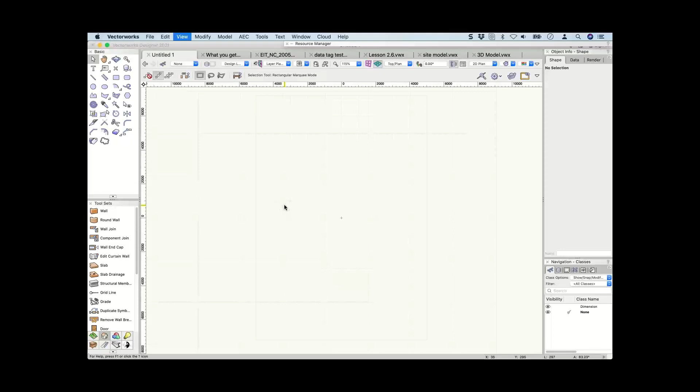It's interesting when I hear your introduction, Barbara. Someone asked me the other day when I started using Vectorworks. It was 1992. Just yesterday. Next year we should have a celebration.

Yeah, we should. Okay, so this is Vectorworks 2021. I've got several files open that should help us understand the things I think are important in Vectorworks 2021. Some things haven't changed a lot. I know they've made some changes to the door objects, but not massive changes like to the window tool, which a lot of people like but you can't get that this time.

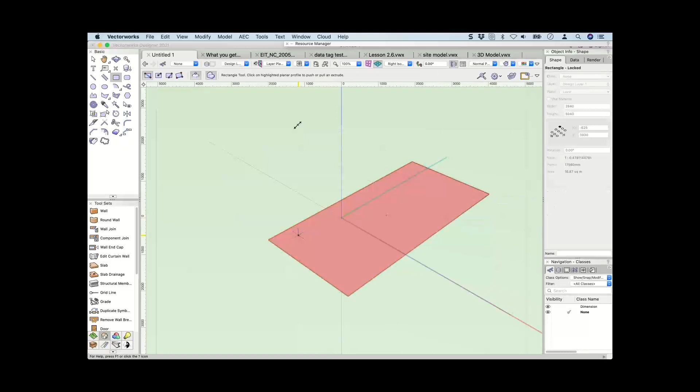No, but let's start with some of the simple things. So this is the rectangle tool. Let's have a look at the rectangle tool in 3D. There's a new mode on the rectangle tool, this push-pull combine tool. The way this works, and it's not just this tool that has it, is when I extrude an object like this, which we've been able to do in the past, this new mode, when used, lets you draw on the face of the object - I better make sure I'm in automatic working plane.

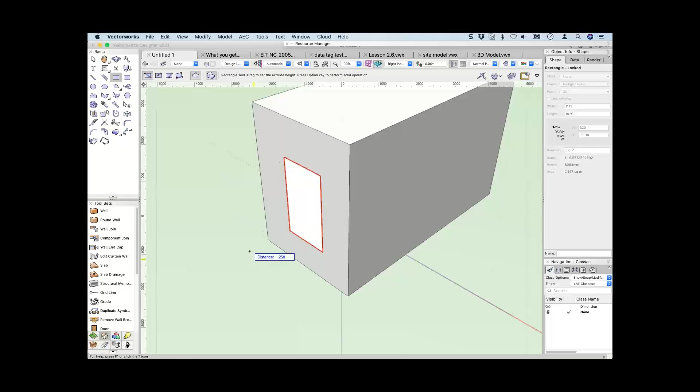So when I draw on the face of my object, if I come away from the object, let's make that about 8 inches, 10 inches, 250 millimeters. When I come away from the object, Vectorworks will now automatically, instantly add those together. You'll notice up here this has now become a solid addition - it's no longer necessary to hold down the Option or Alt key to do it. Now if I'm just going to shell the inside...

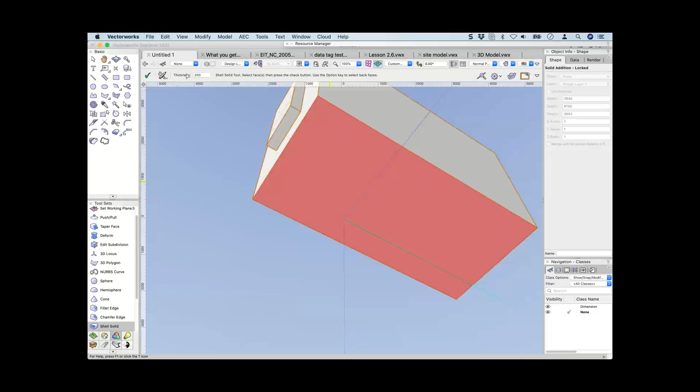This isn't new, but I want to shell the inside anyway. Shell the inside, let's make it 8 inches. This is my inside. Now I go back to my rectangle tool and create a rectangle across here. This time I'm going to go into my object, and it's straight away instantly push-pull. It's made a hole in it, which you can now see because I can see through it. These are the new ways Vectorworks handles 3D modeling.

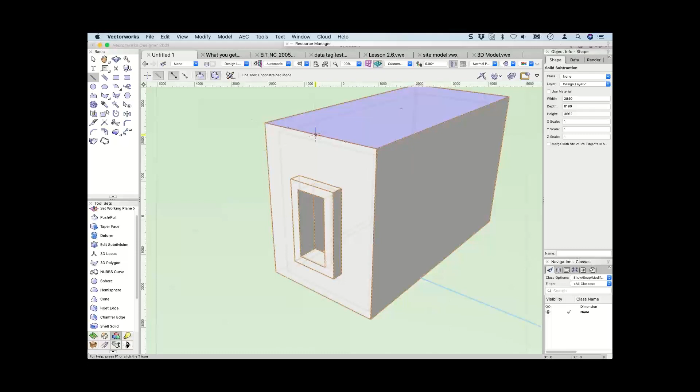If I go to this object here - now I should have done this before I did my shell solid, because it's going to cut through it - but you can now instantly draw on the face of an object, instantly grab hold of it, and pull that away. This is quite a cool way of working now. It's a very quick, very fast way of doing it.

That's new, but if you want to add something to the front of an object - I've just finished my movies for my foundation course, and one thing I learned was when doing the bracket example. I made a little bracket like this, put a circle on top and extruded it. But if I put a circle here and extrude it, and come down here, instead of adding those two together, it actually takes them away. Let me do that again.

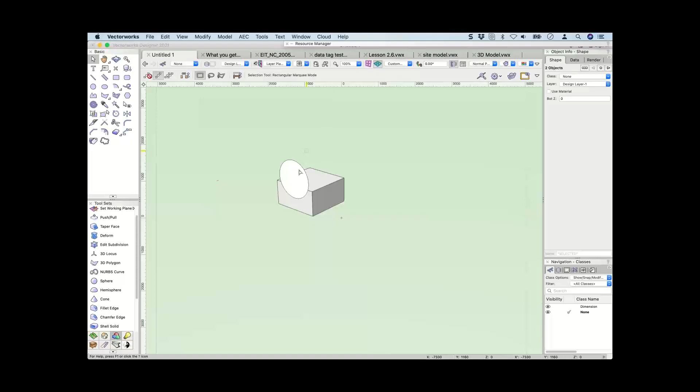I hadn't tried holding down the Alt key to see if I could get around it, so I tried that. Pull that down to there, hold down the Option or Alt key - it still subtracts, doesn't stop it happening. The only way to really stop it is to turn off, when you're in circle mode, turn off that mode. When you turn that off, you can drag it along and it won't add together, but later you can add solid to that.

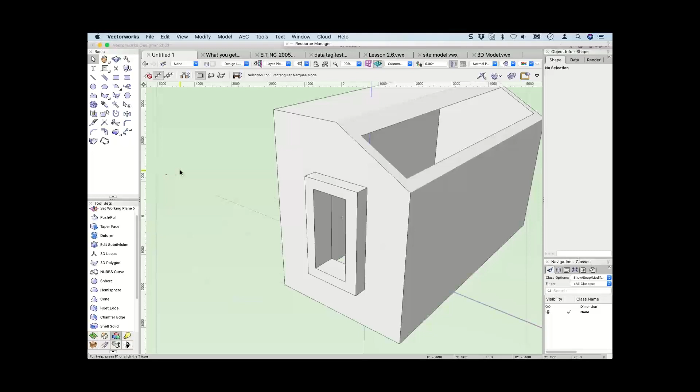So that's just one thing to look out for, I think. It's going to speed up 3D modeling enormously, this ability to instantly add, instantly subtract. When you know it's there, it works really well. There's just the one time you've got to be careful where it doesn't work quite as well - or it's not that it doesn't work as well, but it can catch you out, and that's what it did to me.

Now, one of the main features I found with Vectorworks is this smart options - to me this is a real productivity gain. I don't know if anyone can see it, but there are 4 little things that have just turned up, one there, one there, one there, and one there. These turn up when I put my space bar down.

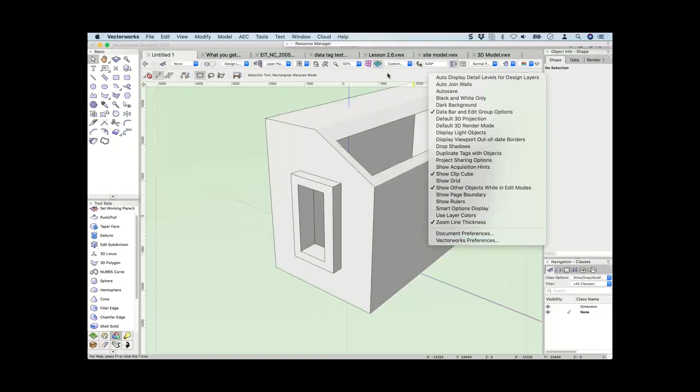Right-click on the toolbar - I don't remember this working before, but right-click on the toolbar and you can go to your Vectorworks preferences. We've got Edit, Display, we've got Smart Options, and here you can choose what tools you want to appear. So for example, if you've got a standard keyboard, you may want to change this to the snapping palette so you can quickly check your snaps when you want to, and leave the snapping palette closed when you don't want to see it.

Previous tools is really handy. I've actually created my own little palette that I like to use, with tools that I want, and it's just a standard palette. I've created a little standard palette and added it to that top left corner. So when I go to it, you'll see it's a lot smaller than the previous one. It's got a couple of my customized tools, but it's got the things that I don't remember the keyboard shortcuts to.

Now, I remember the keyboard shortcuts to lots of things like move tool, or move object - move by points, sorry, it's called. I remember the keyboard shortcut for that. I've customized it to make it really quick to use because I use it a lot. That means I don't have to think about it. The principle behind this is that by putting the tools close to your cursor, your eye doesn't have to leave where you are, your mind doesn't have to change to go look for something.

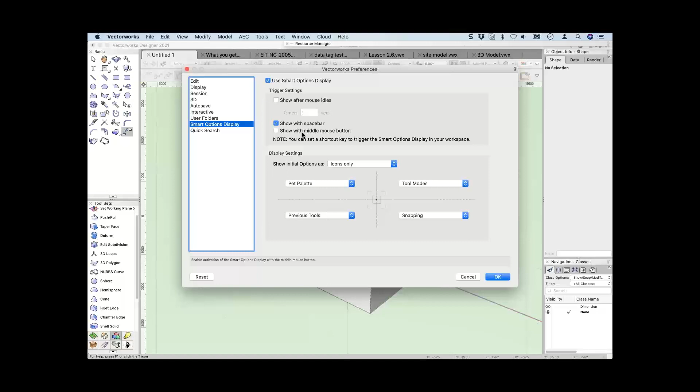And so it can keep you focused on your work, making you more productive. As I said, I've just got a very small number - a couple of 3D tools I use quite a lot and some 2D tools I use a lot. But it's very, very fast, very customizable. You can choose your options, how to trigger it - some people have it after the mouse idles for 2 seconds or 1 second. I just use it with the space bar. You can use it with the middle mouse wheel button, but don't forget that's also the pan tool, so you might want to be careful about using that particular way.

There's a quick search function in Vectorworks now - I think it's under Tools, Quick Search. We want to look for walls, and it brings up all the things that relate to walls, wall schedule, so there's a whole lot of things. This is quite a handy little utility, this quick search. I'd wonder whether we need a key to activate it - it'll be quite handy.

I've got an Excel file on my other computer screen, so I'm just going to go through it. Yeah, the detachable tool palette. So I didn't realize I needed detachable tool palettes until it occurred to me that we normally have to look at classes and layers separately.

Now, it's not so bad in this particular file, but let's go to a file where there's a lot more layers and classes. And this is quite nice because it allows you to see all of your classes and all of your layers together. You can also drag some of these out. If I don't want to see that anymore, I don't use reference files very often, I can remove it. This is my viewport, so I hardly ever use this one. I'm going to remove that as well.

Oh, sorry, that was saved views. I do use saved views, so I better bring that back. Window, palettes, saved views. So there's my saved views, and I can put that back where I wanted it there. But usually I use saved views from this pull-down menu anyway, so I could easily get rid of it. Viewports, I don't use these very often. You can drag them out and then close them if you don't want them.

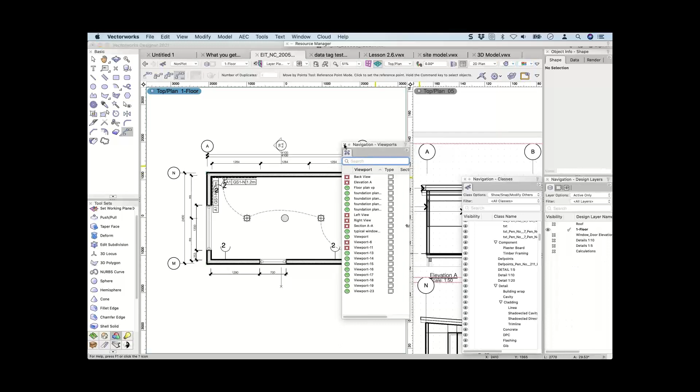And shape and data would be really handy to see both at the same time. So I can see the data attached to an object and I can see my shape at the same time. So if I select an object like this, I can see the shape of it. I can see the data. Of course, I've got more palettes open. Maybe I need a bigger screen, but if I do have another screen, I could just drag all of these onto the other screen. I could have all the palettes open, so it could be quite handy.

But for today's presentation, I'm going to put them back. And you'll notice that when you put them back, you can choose where they go. So you can now reorder these palettes and put them back in the order that you want. We're so used to having the classes first. I just grab it by the tab, and then I can locate it in there. I can move its position along if I want.

And so those are really handy. As I said, I didn't think I needed them until I could have them. And now I'm really quite happy with those. The ability to do those things together is quite nice.

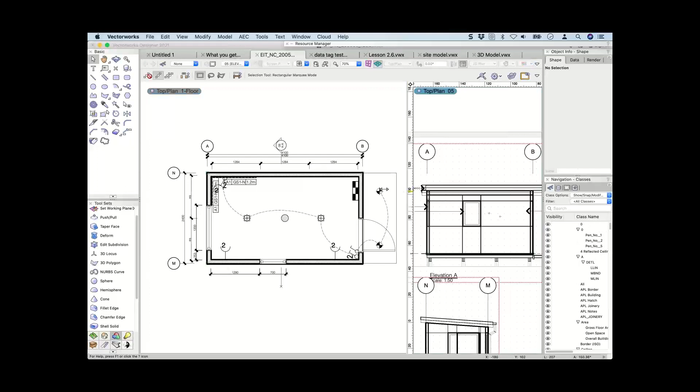We need to look at our smart markers. I've got here a drawing and a design layer all at the same time. So I'm looking at a sheet layer and a design layer together. And I wanted to look at the floor plan of this one. So click there. You can see it's my active one, it's gone blue. And let's look at my foundation plan. There it is there, and there's my smart marker.

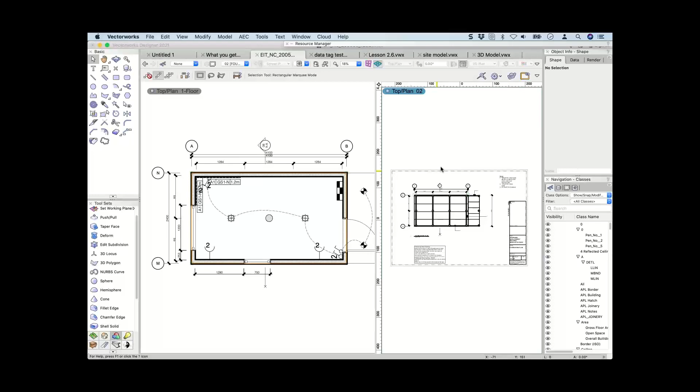So I'll just bring that and make that the front view. So there we are, there's my foundation plan. If I double click on this, I'm going to delete that particular label. No, just the label, thank you. There we are. And I'm going to look at my markers. So annotation. Now there's several smart markers now.

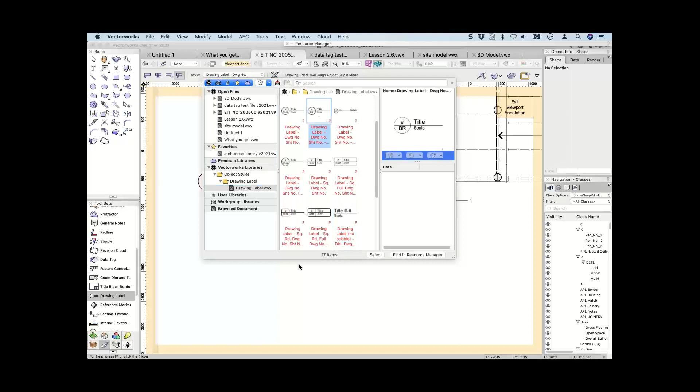They've changed things like the drawing label. I'm going to change this to another drawing label type. I'll use that one. So this is a pretty standard drawing label.

I see there's some questions coming through. I'm wondering if it's possible to create parametric objects. Absolutely, you can do that. Not for today, we're not going to cover that. If you don't see the push-pull mode for the rectangle tool, change to a 3D view. You don't see it when you're in a top plan view. Do I use a customized workspace all the time?

Let's just go back to this tool here. So this is the standard drawing label, and we used to be able to choose whether we had the scale, whether we had the note, whether this line was fixed automatically to be the one length. But we were limited to what we could actually do with these things.

So in Vectorworks 2021, one of the things they have changed is they've changed nearly all of the markers to what they're calling smart markers. So this is a drawing label style. So that's my own one. I've already customized that one.

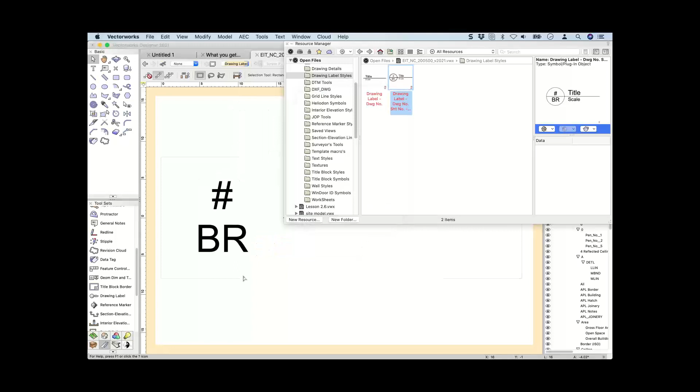This is the one I've just used. Right click, let's edit this, and we will edit the drawing label layout. So this is the layout for my drawing label, which means that I can move this to a different place if I want. I can move the title somewhere else if I want. And when I do that, it affects what we see on my screen. So let's exit that, and you can see it's changed those parts.

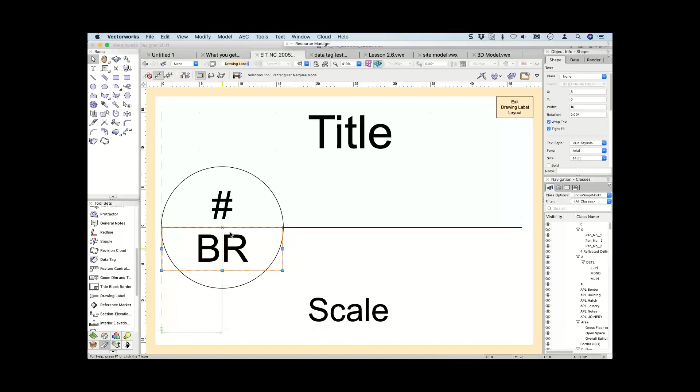Let's edit this again. Let's say I don't want that, and I want that to be something else, or I don't want it. I want to get rid of that circle. I want that to go here, and I want this to go there. And I might want some other piece of text on there as well. So I'm just going to make a copy of that. And now we have the ability to say, let's get automatic text. Let's define the text label.

So this is very similar to the way we create title blocks. We also had the data tag. This is very similar to the data tag. I don't want it to be the scale. I want it to be something else. Maybe we want that to be the drawing. We've done drawing number, custom scale note, label length, printed length, sheet number, scale factor.

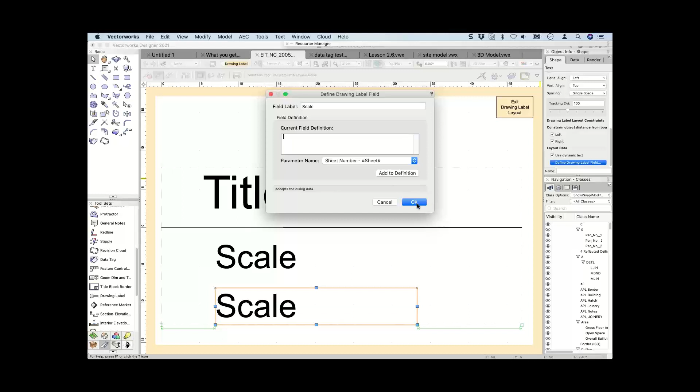It would be nice to have something else like the design layer or the sheet layer. I'll just put sheet number on there. And then hopefully that'll bring all the information up. When we exit the viewport, that might give me what I want.

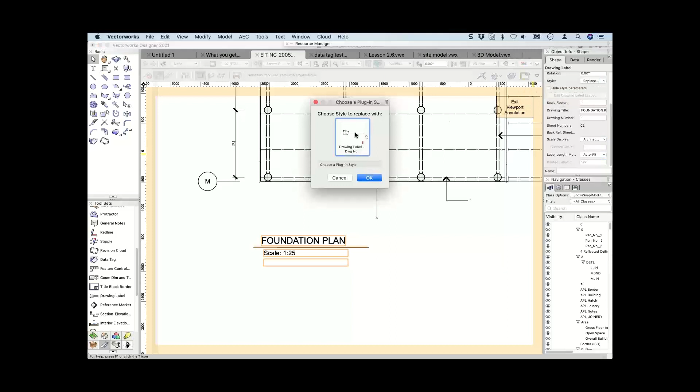Also, if we don't like that label, I can swap that label with another one. Sorry, here's my style just here. I'm going to replace that style. Where's the one I do like? I've gone to some trouble setting this up. And I'm going to go, okay, that's my foundation plan. You notice it's quite small. It's just the size that I want. It's got the graphic style I want. It's got the fonts that I want. So I've had quite a lot of control over which parts of that label have got which fonts, how long the lines are.

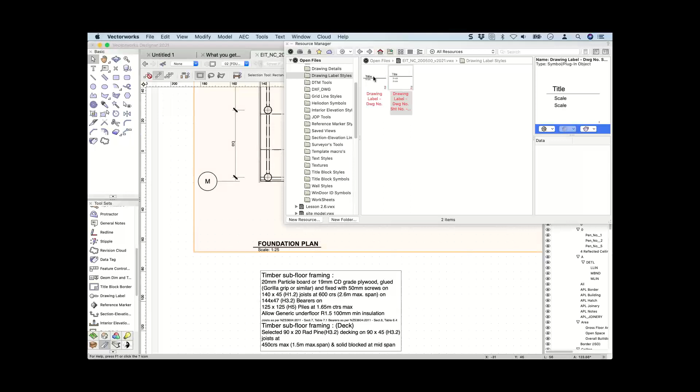When we edit those lines, we've now got the ability, let's edit this one. Oh, that one. So one of the other things that I've changed with these smart markers is that this piece of text here, this title, it's got one of these little green constraints. This is from, where do they hide?

Constrain, coincident. In Vectorworks, we've always, well, for a long time, we've had these constrained objects, constraining things to other locations, constraining things by length, constraining things by vertical distance. And so we've got something similar to that here, where the start of this text is constrained to the start of this line. So wherever I click that line, that'll start that.

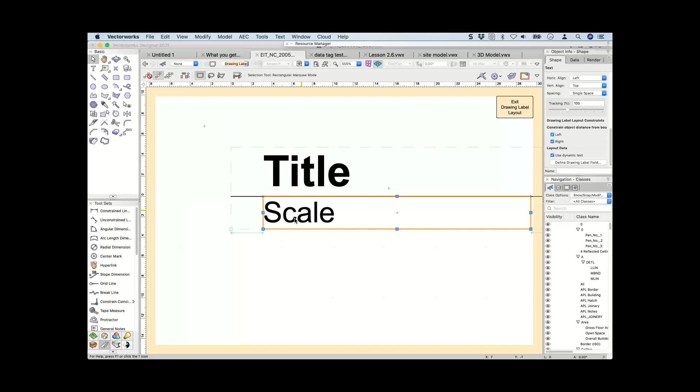But the other thing that happens is there's a length of text here. The end of this line is constrained by the end of the text. As the text gets longer, that line will get longer. Same thing here, and you'll notice this in a lot of these smart tools, this constraining the text to the end. It works really well. So don't forget about those things. I really like these. They've made it a lot more flexible, and I really quite like it.

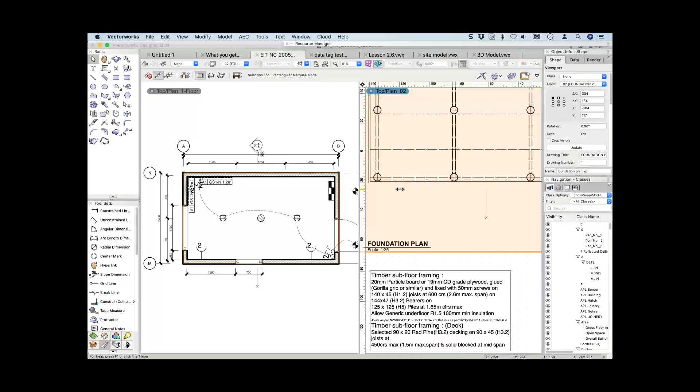I'd like to have a look at, let's go back to this foundation plan, and I want this one here to be looking at my elevations. Okay, so there are my elevations. You notice that I've got grid lines on my elevations, which are quite nice. There's a new Gridline tool. Oh, so let's activate that one. Let's choose the grid line. So there's my grid. So I'm going to put a grid line here.

And the grid line turns up there. So putting a grid line in my plan makes those grid lines turn up in my elevations. If I move the grid line, it moves here. So these are really quite cool. Finally, we've got this ability to put grids in our plan view and have them automatically turn up in our elevations. When I go to select one of those, what's the name?

I better just check the name of this viewport. This is elevation A, okay. So if I look at this viewport, I can choose grid line instances, which is a little bit like section line instances that you have. So if I turn off that, let's click OK, and you'll notice although my grid line is still here in the plan, I've turned it off in that elevation. If I turn it back on again, let's turn on elevation A.

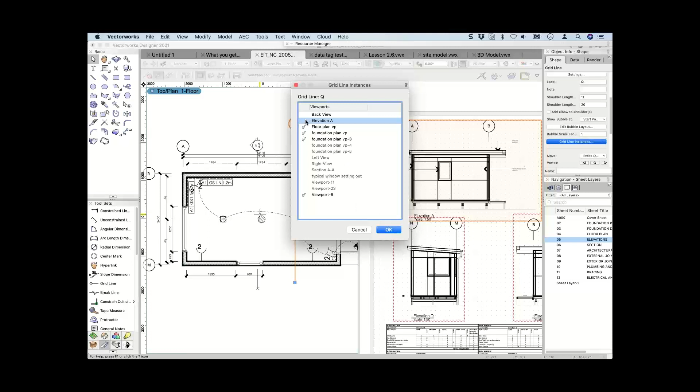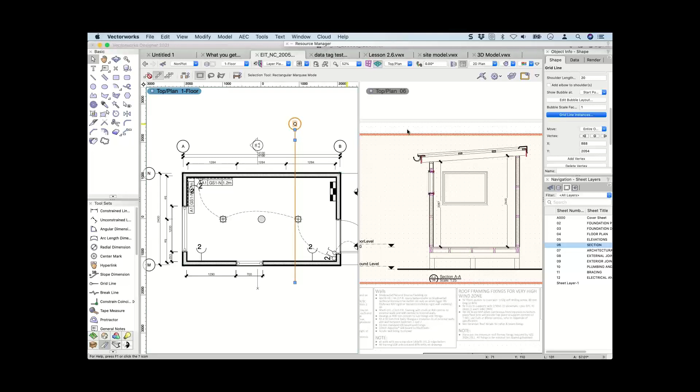It'll turn on in that elevation. Now I've had trouble getting them to turn on in sections. And I don't know if it's something I've done, but when I look at the grid line instances here, I have trouble with this grid line instance making it appear in the section. You see my section is grayed out, and it might be because my elevation or my section is not perfectly perpendicular to my grid lines, these two here. So I do need to go back and check those to make sure that they're perpendicular.

If you don't make your section cuts perpendicular, I wanted that one to be there and that one to be back there. If this line is not perfectly perpendicular, it won't appear in that view. So let's just make it ever such a small amount. And you'll notice straight away it disappeared. As soon as it's non-perpendicular, it disappears.

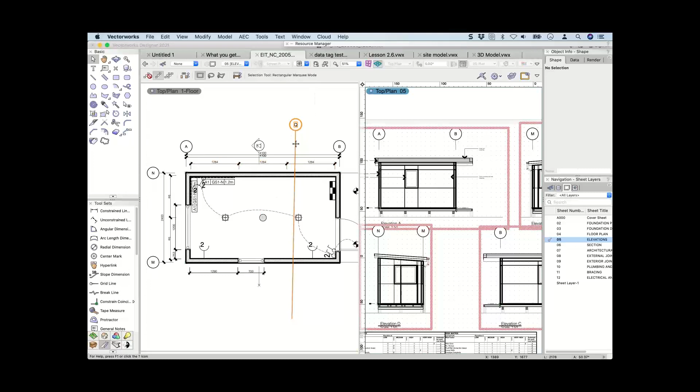My group had a bit of a discussion about this, and the feeling was that, well, if it wasn't perpendicular to the view, how would Vectorworks know where to display it? This point, at that point, where would be the logical place? So it kind of makes sense, but it's something to watch out for, particularly if you're dealing with rotated views.

What's next? Oh, someone asked about these section lines. These section lines are also now smart objects. If we have a look, this is an unstyled one. If I change this to a styled one, let's replace it with one of the standard styled ones. And someone asked the other day, what happens if I change the angle of that? What happens to the line and the text? And you can see the line and the text have stayed there, readable, even though I've changed the angle of it, which is a really nice trick.

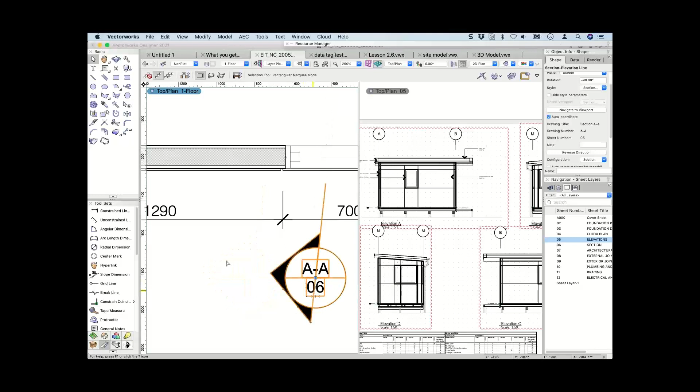I think that's all I want to say about the smart markers. I think I've covered that. Of course, Vectorworks have improved the Vectorworks graphics module, which speeds up drawing. You won't notice it, but it's a really nice thing that it's sped up. Now I want to get back to my 3D model, wherever it's gone. I think I made this earlier on. One of the things that's changed in the 3D modeling, I've covered the smart tools, or the instant push-pull, but this is also quite new. Right-click on part of your object. Now I can either edit the object, which takes me straight into the drawing.

Someone's asked a question about smart markers. Sorry, Bo, I'll come back to that if that's all right, Bo, in a second. Just please remind me.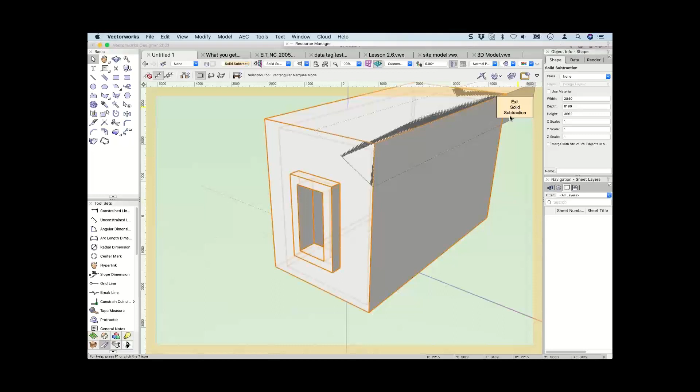So when we do edit, we can either edit the model, and this is the standard thing that we do, where we go edit solid, and then it takes us inside, then we go right-click and we edit the next bit. But the new thing in Vectorworks 3D modeling, which I think is really powerful, is the ability to right-click on an object like this and choose Edit Features. And now it should take me in to edit that part of it.

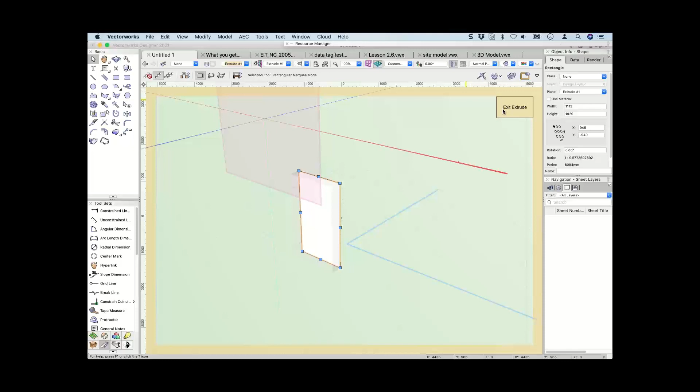So let's go to Extrude. So I'm now inside that extruded object. I can now edit that extruded object. I can change the shape. I can round the corners. I can do all kinds of stuff to it. You still have to step out. You still have to go through all the parts of stepping out. But it is a lot quicker to get you into that to edit it. So you go right-click, you go Edit Features, and right-click.

So now once you're inside Edit Features, you can choose this feature. Do you want to edit that feature? Do you want to edit that feature? And it takes you right into the feature that you want. Now the keyboard shortcut to exit all of these quickly is the Command or the Control key and the open square bracket. So it's really quick if you do that. I don't know if you guys noticed how quickly it was, or if you heard my keyboard, but I just bashed my keyboard and I jumped straight out of that.

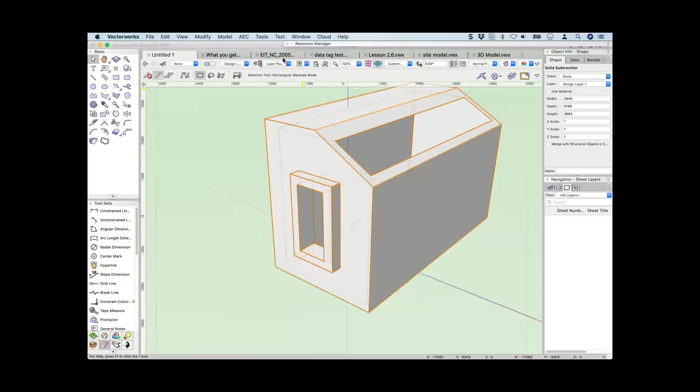Bo was asking about back referencing. I need a detail to back reference. Have I got a section? Let's go to my section.

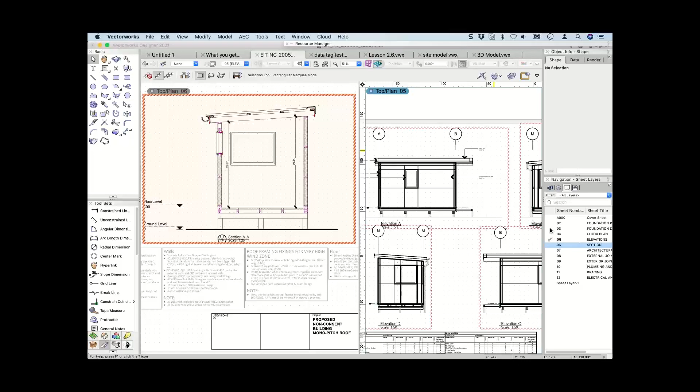Bo, I need a detail to look at as well, so I better find a detail that I can use. I don't think these drawings are set up properly for details. Foundation detail. I think there's only one viewport, Bo, for all of my details, which is a bit naughty of me, I know. Let's just have a look. I think that's one detail, and it's not even a detail, it's a PDF page. So I'd need a detail to do it.

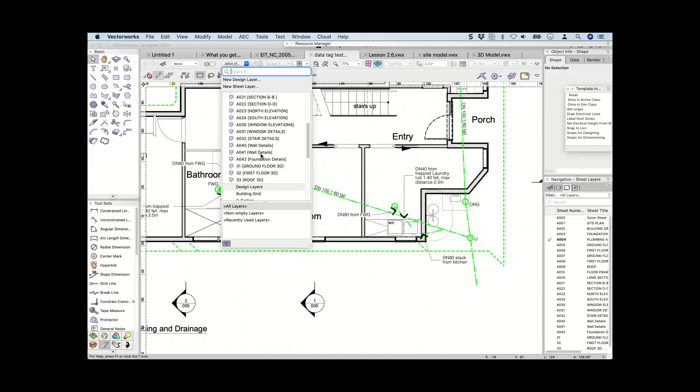If I double click that, am I in the annotation part of the viewport? I am. No, I've put that on a design layer. So what I'm going to do is the other thing that's improved, Bo, is where's it gone? My detail call out. So my detail call out, let's change the angle. This one here, let's make it about 6 inches. So let's click there and click there.

And that's my object. This is also one of the smart markers, and this smart marker, you can also change the style. So you can replace the style, you can edit the style. I've actually started customizing these as well. But the thing I wanted to show you, Bo, was that if I grab that handle, I can move the label anywhere I want, which I think is really nice. So we can put that in. Now that's not back referencing, I know that.

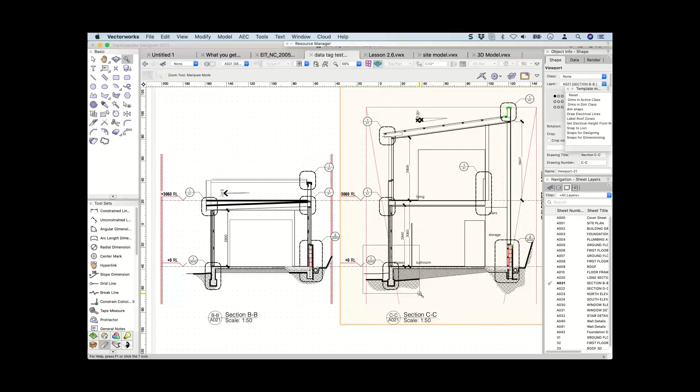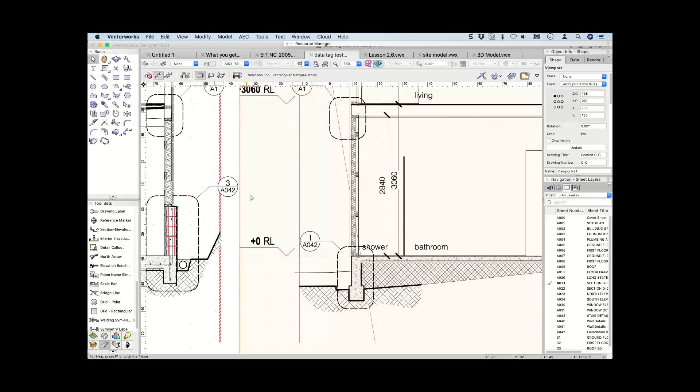So let's go back to, what sheet number is this one? This is sheet 21. I need to find one of these details really. Let's go and see if we've got sheet 21. No, what number is that? Sheet 42, have we got 42? I might not have the sheet, but yes, oh, there it is, I just saw it, 42. Okay, so that's my slab thickening, there's my slab foundation, there's my label. This label's giving me this drawing number here, which I don't like very much.

So what I'm going to do is, we're going to create a new plugin from that style. It's a drawing label style, and we're going to edit the layout. And this one here, Bo, I'm going to change that one. And that one wants to be, delete that. There's one called back reference. Okay, exit that. Okay, that. And that should give me my back reference. Now, I haven't included the back reference up here.

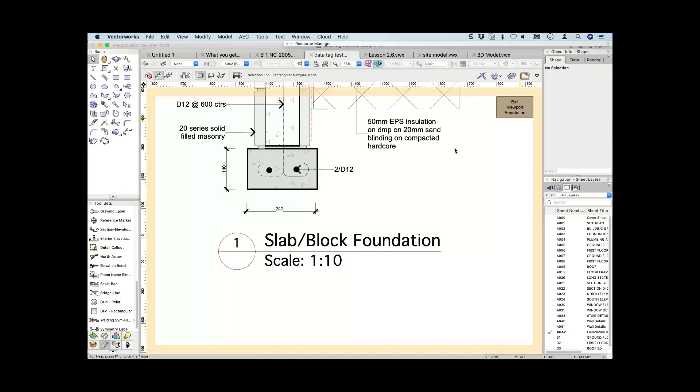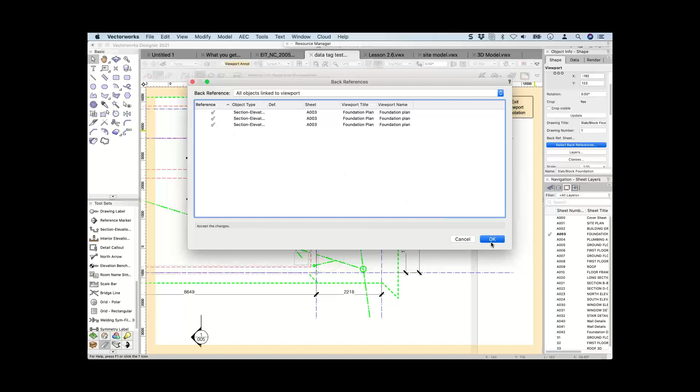Back reference number. So when I go out of my viewport, what I need to do with my viewport is to tell it where the back reference goes to. So it should go to sheet, this one here. We're going to choose all objects defining the viewport. We're going to put one of those on. Sorry, all objects linked. Okay. So that should have brought up my back reference, shouldn't it?

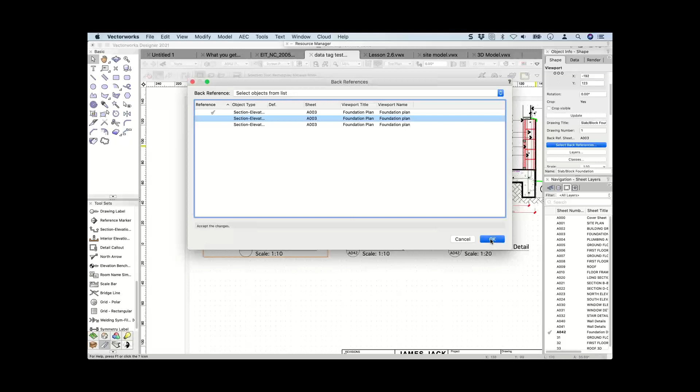I did this on another drawing, but the answer is yes, you can do it. So I just don't know whether I need to put that in again in order to make it work, but it should bring up. Let me try just choosing one of them. Select objects from list. Oh, come on, now it's misbehaving. How about that? Just choosing one of them, and it should turn up. So the short answer is, does it work? Yes. I just can't do it right now.

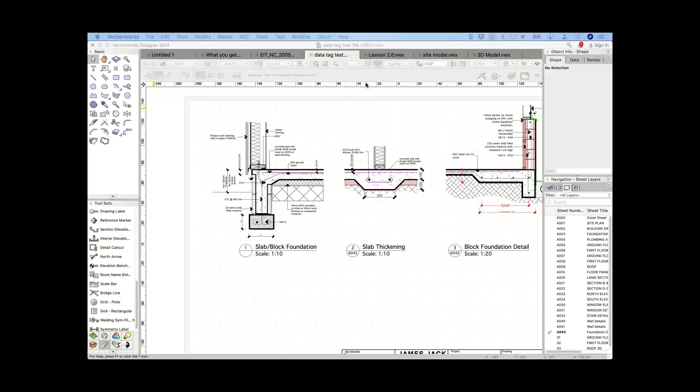Let's move on. So I've covered move by points. It's one of the tools that I quite like changing. Duplicate array is now updated to use a working plane, which can be quite handy. We can now change the interactive appearance settings for light and dark backgrounds. So when we go to interactive and we look at our interactive appearance settings, if you're using a dark background, you can change all of the colors separately from a light background. I tend to use a light background. It's the way I've learned Vectorworks, so I'm not going to change that too much.

I found this the other day. I didn't think it was a big thing until I talked to other people, and they thought it was quite nice. I quite often duplicate a class.

The problem I've got with duplicating a class is that when I duplicate, if I duplicate lighting, for example, I used to get lighting-2. When I went to edit it, it wouldn't allow me to because the dash was creating another group. Well, they've gotten rid of the hyphen and they just put the number 2, which means that now you can instantly edit that class. I know it's a small thing, but it was just frustrating in the past.

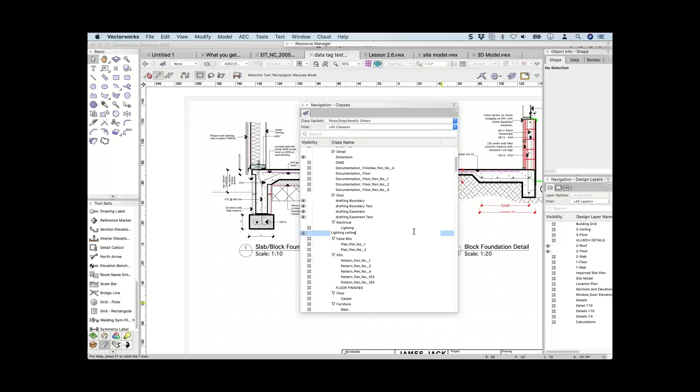It's just one of those tiny things that I didn't realize was there until I started playing with it, and I just think it's a really nice little technique.

I think we've looked at the 3D modeling techniques that we've changed, and the edit feature I've just looked at that. So the next thing is materials.

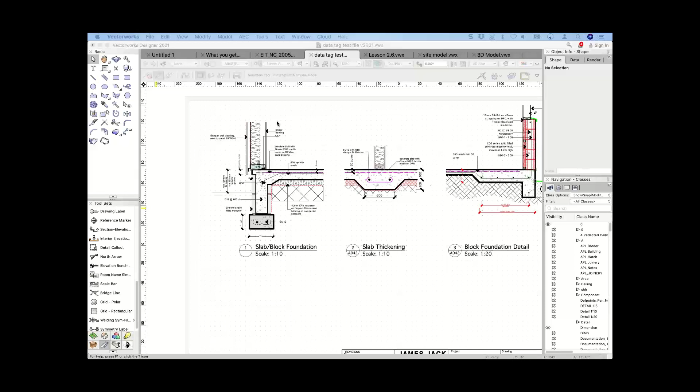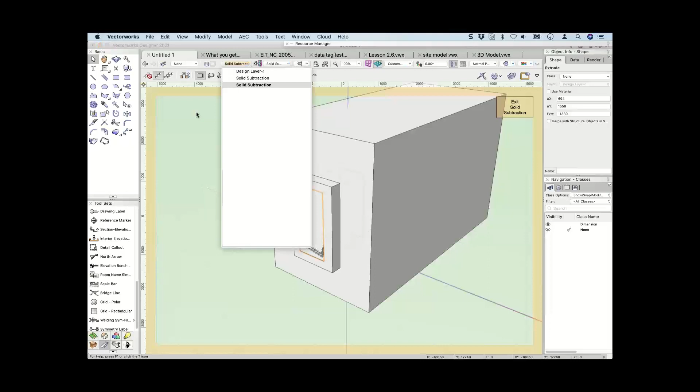Someone said that you can also use the layer pop-out to exit quickly in the 3D model. I wasn't really a fan of that to start with. Let me go to the edit feature and edit that one. You can click here and jump out. I tend to use the button here, and I tend to use the keyboard shortcut most often.

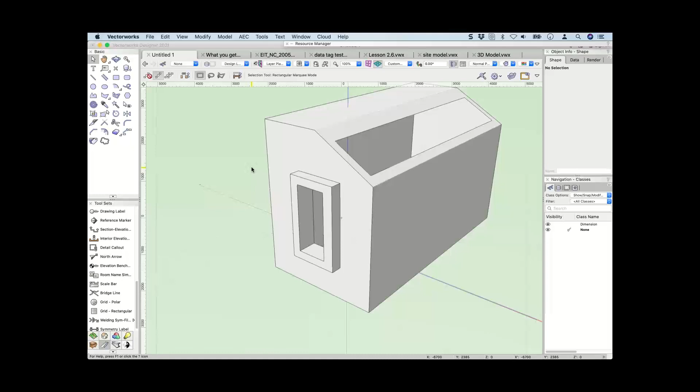What other comments have we got? Someone wants me to describe back referencing. It's where the detail tells someone who's reading the drawings where that detail is located in plan, sections or elevations - in other words, where's the original place for that detail reference. It is very handy. I know I can't make it work, but it does work.

Let's go to this one. Some slight changes to the windows and doors. I know it probably takes a lot to do the windows and doors. There are some slight changes to the sliders and to the barn door. I didn't want to focus on those too much.

One of the things I would like to talk about is the new materials, and I think the new materials is going to be a big improvement in Vectorworks. In the past, we've used textures or classes to control textures, or we've used classes on objects. The challenge comes when you've got something like this wall - we want this wall, and that wall, to have the same material as these columns. They're different objects, and I might want to display them at different times, so I end up making multiple classes to turn them on and off or to control the textures on them. The materials, I think, are going to be a powerful feature.

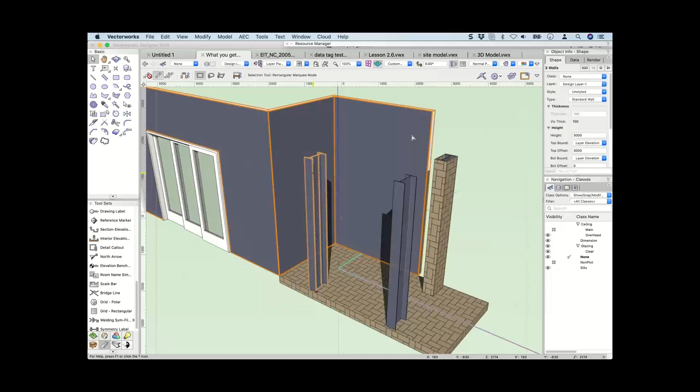If I select that column, go to my settings, and select my shape, I now have the ability to choose the material that's being applied to that particular object. So the material has a texture component - what this material looks like in a hidden line render, and what it looks like when it's cut through. So it's the 3D view, the rendered view, the 3D hidden line view, and the cut through view.

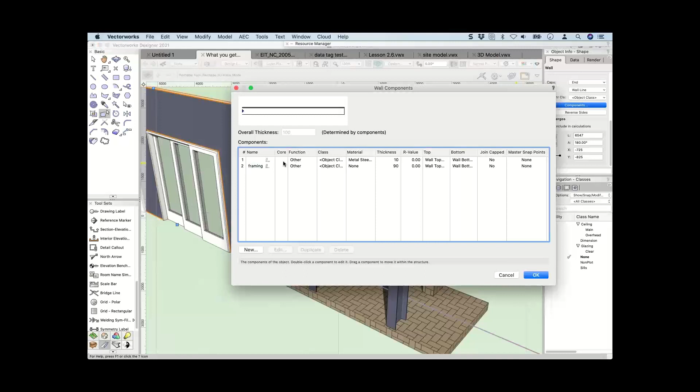It means I can apply the same texture to both my walls and to my columns, so I can make them appear in 3D to look identical. So this wall here has got a component. I don't think I used a style for this, but you have to use components if you want to use materials. So this particular component here, let me just open this.

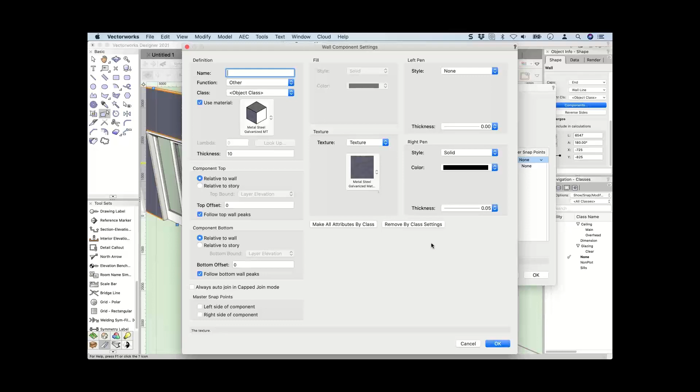You'll notice here that I've got the material here. I've said use materials, I've given a thickness to it, and it's also metal steel galvanized. So the material controls the fill and the texture. I've applied the same material to both the walls and the columns.

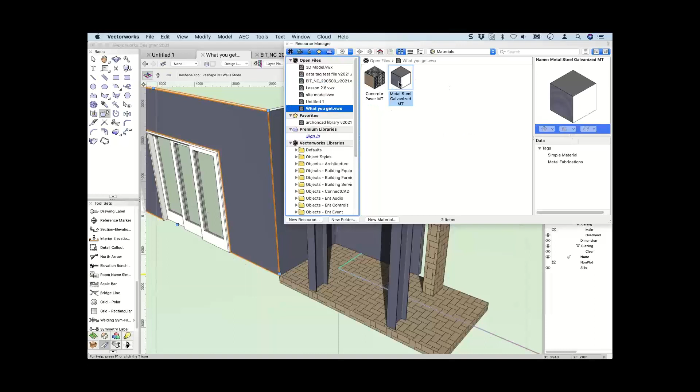You'll notice that all the objects with the same material have been updated, which I think is quite a nice trick. I think it's going to take us a little while to understand where and how we're going to use materials, but I think they're a powerful move forward in Vectorworks.

I really think materials are going to change the way we think about using classes particularly. We'll use maybe less classes. Classes will be used more to control visibility of objects rather than three-dimensional texture presentation. We might still use classes to control graphic style in plans. Anyway, it's just my thoughts.

I think we've got a lot of learning to do about materials yet, so I think it's one of the things we'll come back to again and again.

We do have the ability to edit the material. If we go edit, I skated over a whole lot of the stuff. So we've got the material, we can choose the fill, look at the construction - what's it made of, who's the manufacturer, does it have a reference, what about the physical properties?

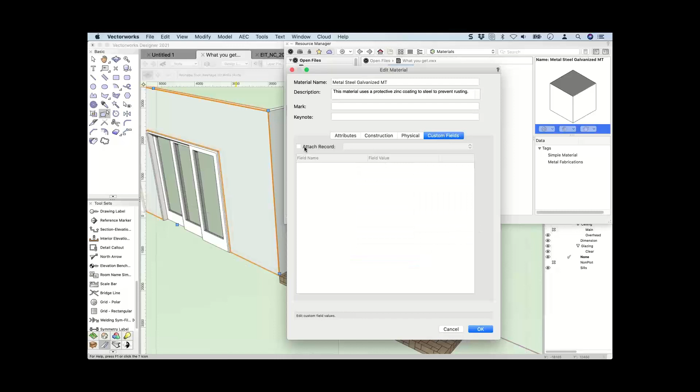And you can add your own custom fields to these if you want, so you could add your own information to materials. As I said, I think there's a lot to learn about these. I think it's a huge leap forward.

I've covered the grid line, I think. How are we getting on for time, Barbara? Let me see now, okay.

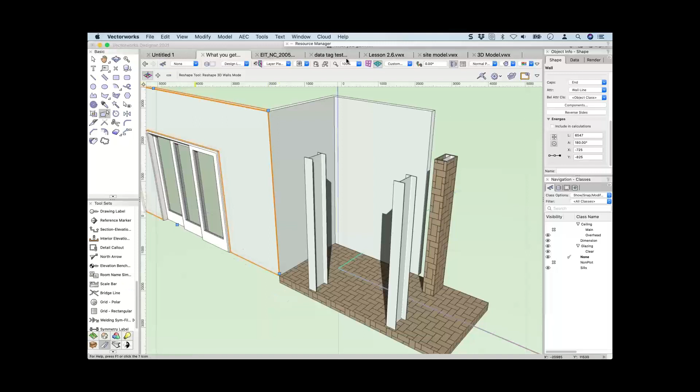Now I think the last thing I want to talk about is some site modeling stuff. Let me just have a look at my notes. I'm not sure if we've got any site modeling people here, but I wanted to look at site modeling.

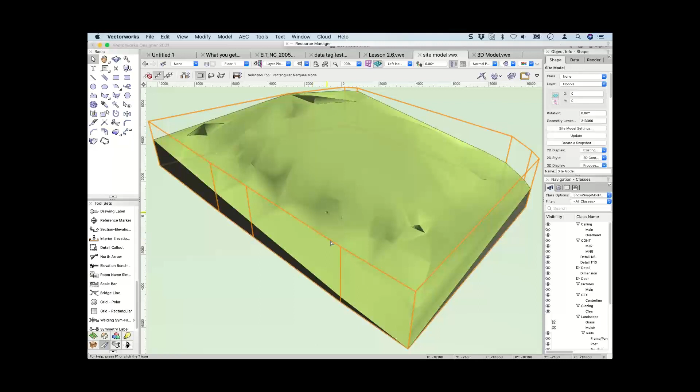So site modeling - when we look at the three-dimensional view of a site model, this hasn't changed very much. We still have the ability to smooth it, the ability to do cut and fill calculations. None of that's really changed very much. But one of the tools that has changed a lot is the landscape area tool.

Now I'm going to need to change to a landmark workspace. It's always taking ages. Oh, finally, okay. So the landscape area tool has changed a bit.

Let's just have a look at its options. So the dialog box has changed. I'm going to convert this to an unstyled one. So we still have the ability to put in the landscape area, but they've changed this dialog box - made it one of the modern dialog boxes, so we've got plant information, graphics, display. All of this used to be in one place, and it was a big dialog box. Now we've gone to the sort of column or palette pane-based dialog box.

So we still have the ability to give it a name - this is my mulch area. I'm going to put down some topsoil, and some mulch on top of it. Do we want a tag? No, I don't want a tag - I don't use tags these days. Do we want a class for the tag? Don't really worry about that. So we're going to have that information.

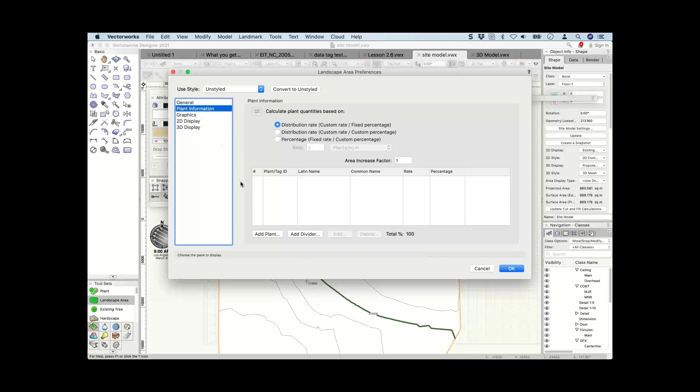We can put plants in if we want, we can put in the distribution rate. I'm not going to add plants at the moment. We can have graphics, we can randomize the plants. So a lot of these are the same as they were.

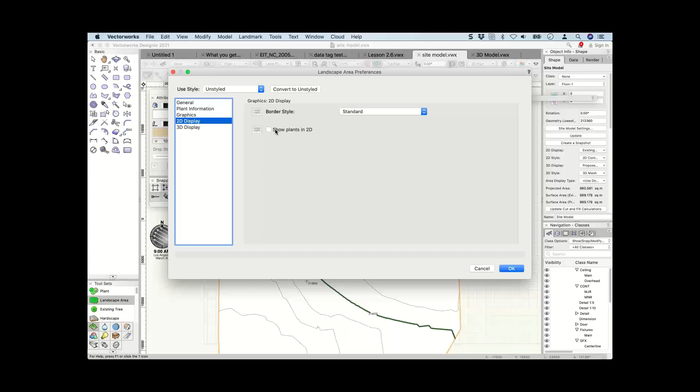This is new though - show plants in 2D. In the past, we couldn't show plants in 2D, we'd just see the plants, we'd just see a general area. I haven't tried it yet, but I suspect it could add a little bit of time if it's a very large area. And 3D.

3D, show plants in 3D - that's not new. But this display as 3D polygon or display as texture bed, these are new. I'm going to display as a 3D polygon, see what we get.

And I'm going to look at this new button here, Edit Components. I think this is new. The components allow us to choose. I'm just going to delete these, and let's edit this one.

So what should we call this one? We'll call this my mulch. So this is my mulch. What class is it? Have I got one called mulch? Yeah, let's put some mulch in there.

Can we use a material? Let's have a material. We need a material called mulch. I think I better look for one. There's one there. I'll use that mulch there.

How thick is it? Let's make it about 10 inches, 6 inches thick, so 150 millimeters. And I can choose the color and stuff like that. So that gives me my mulch. I can now choose whether the mulch is defined to the top or the bottom, which is quite cool.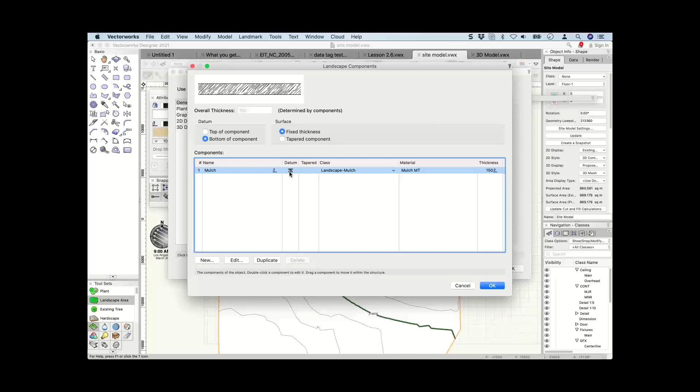So in other words, this is going to sit on the top of my mulch will sit on the top of my landscape area. If I do that, the bottom of the mulch is going to sit on the top of my site model. Let's go new, let's make some topsoil.

So I've decided that in order to do this, I need a class for this, landscape. Do I have a landscape area? Landscape and topsoil, okay. So I need a material.

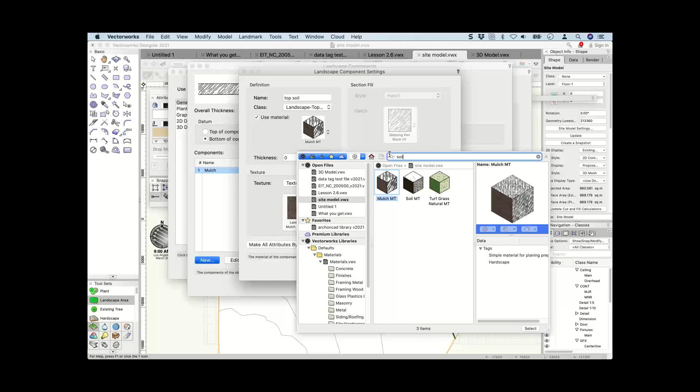We got some soil, let's have a look for soil. Soil, that'll do, and okay. Thickness, this is going to be about 10 inches, so 250 millimeters.

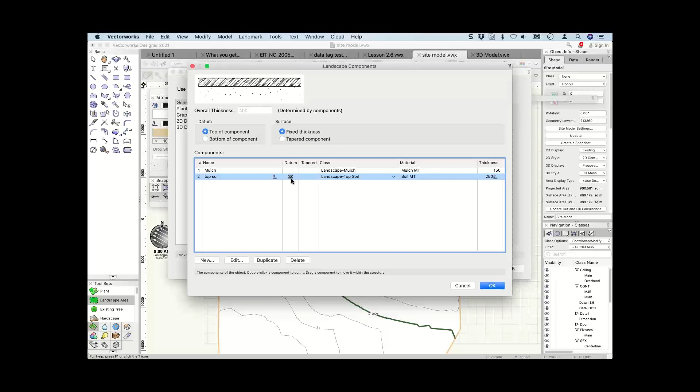So now I can choose, is the bottom of the topsoil sitting on the top of my site model, or is the top of my topsoil sitting on my site model? The other thing that's going to happen is this is also going to give me the ability for this topsoil to subtract the area of my site model, affecting my cut and fill calculations.

So let's draw some. Landscape area, click to start, click over here, click to start. And I'm drawing a square object. Don't forget, everyone, the K key to close. I don't know if anyone remembers this, but we've been able to do this for ages. It's not new, but it does make it quick.

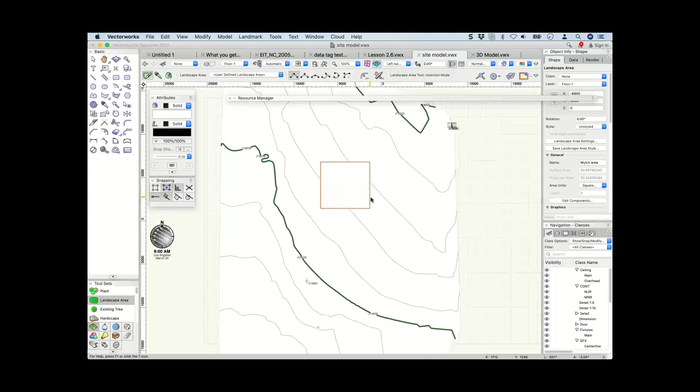So let's have a look at this in 3D. That's my landscape area. Now what we should be able to do is send that to my site model. There it is there. We're going to update. Cool. So this is my landscape area down the bottom. And you'll notice that it's actually cut a hole in my site model.

If we look at our cut and fill calculations, that mulch area that I put in has affected my cut and fill calculations. Now the reason you can't see it, I don't know if anyone remembers, but when I looked at my landscape area, where's it, landscape grass, mulch, I had those turned off.

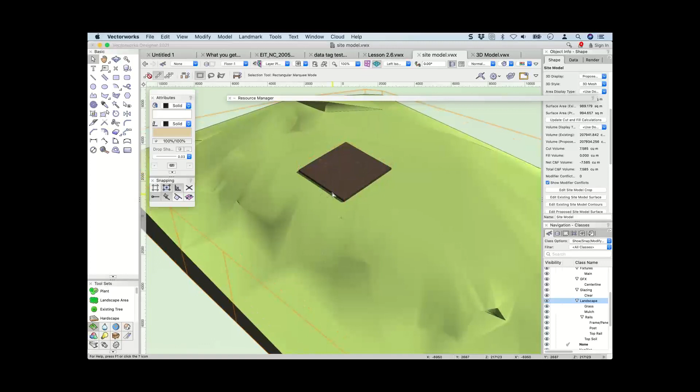So now what you can see is you can see my mulch sitting on top of my site model and my topsoil cutting into it.

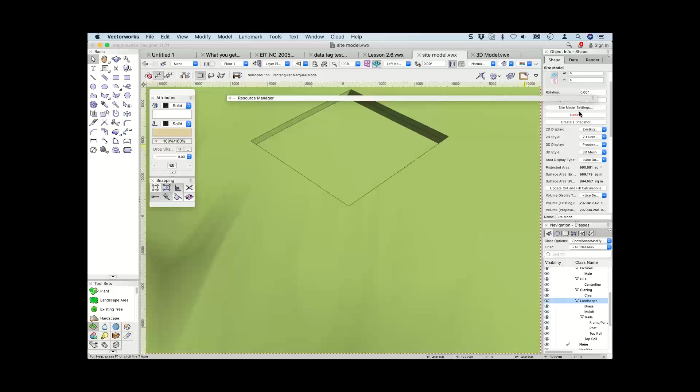Now if I delete this object and select my site model, so just have a look here, I've got some cut and fill calculations. Let's update this now. Update my cut and fill calculations.

And you'll notice there are no cut and fill calculations anymore. There's no cut volume. So that landscape area you can now use as an object that will add or subtract from your site model, affecting your cut and fill calculations, which I think is pretty cool. You can't use it as a flat surface. It is like a texture bed. It does just sit directly on top of the site model.

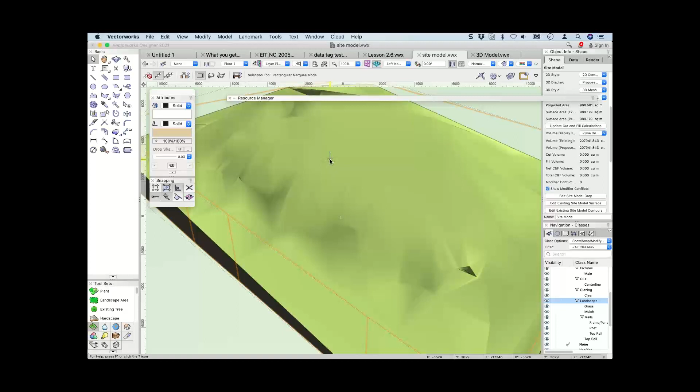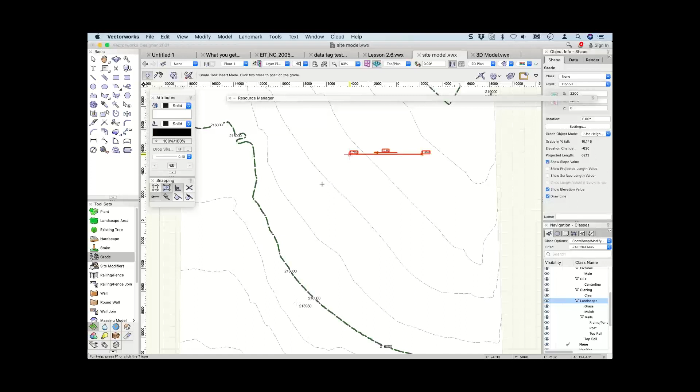And the other thing I was going to cover was the grade object. Vectorworks have talked about this grade object being a network, being able to create a network. I'm pretty sure in the past you could always, we're going to change the site model. I'm going to start by using the heights from the site model to start with. I'm pretty sure in the past you could always just connect a couple together.

And you'll notice that I've only got one number at the end now. There's only one number here. If I move that grade object, so let me select that.

Let me select that one. If I move that blue handle there, you notice it's moving both grade objects, which is quite cool. If I change these grade objects, I better select them both.

If I change these to change the site model, they become site modifiers. And now when I change the height of this one, so let's go back to that one, the slope is going up. Let's change that grade object. Elevation 2 is this one here.

Let's make that one, we'll just take a few hundred millimeters off that one. So minus 12 inches or minus 300 millimeters. So that's pushed that one down. It's also pushed the end of this one down.

When I update my site model, we should see a change in my contours, particularly in my site model if I change to smoothed, and my resource manager's in the way now.

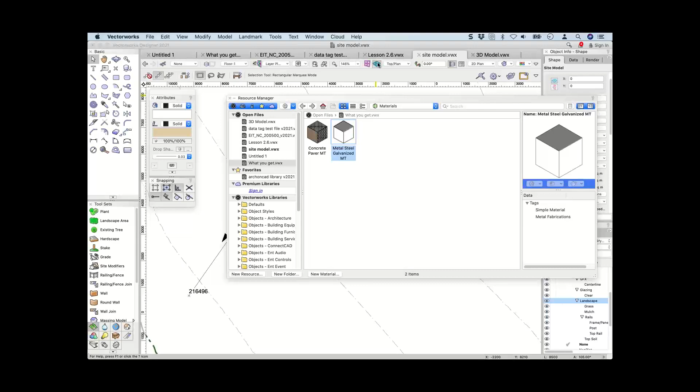Proposed. So you can see it's now started to affect my site model.

If I select that grade limit again, if I select this grade object and I move it, it'll allow me to move. Sometimes I have trouble selecting these. There it is. Now there's two dots here.

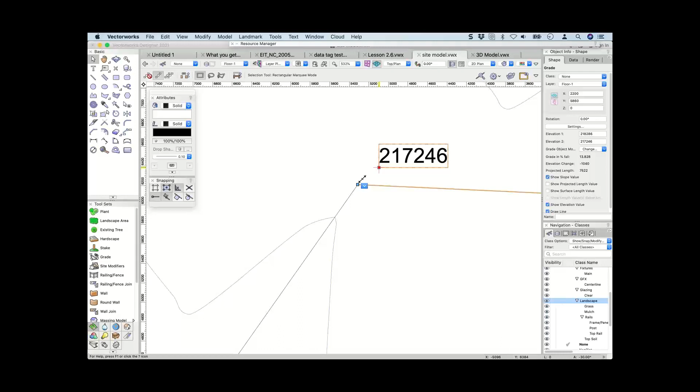This dot is for the number. This is for the end of my grade limit. Let's move it down there. You notice they both move. Update my site model and they'll be done.

So Barbara, that's probably all I wanted to cover at the moment. I see we're getting close to the end of time anyway. I'm just having a look to see if there's any questions. I think there's a whole lot of questions, which I didn't see.

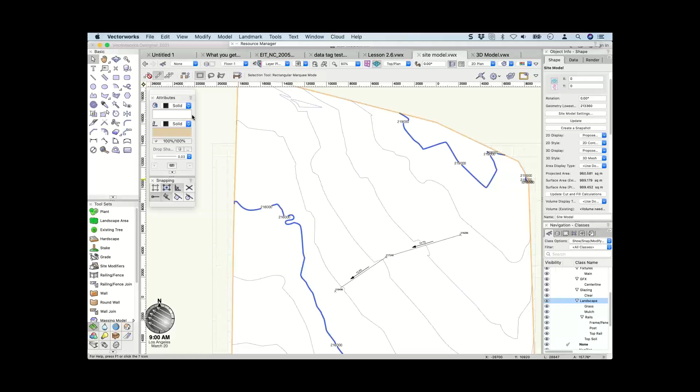Oh, I forgot to add the definition tag. Yeah, you're probably right. It's one of the tricks I always forget with that, is forgetting to add that to the definition, and then I can't remember why it doesn't work for me. To get back reference, you need to select add to definition. Yeah, a couple of people have found that.

Do you think materials can be used to call up finishes? I really think they could. I think that's it. As I said, I think that materials are a completely new thing. I know a lot of people have asked for materials in the past. Why doesn't material do that, why don't we use materials? But I think the way they've implemented it is going to be a bit of a learning experience for all of us, and as we learn more, we're going to find that the materials are more useful than we thought they would be.

Yeah, so everyone managed to pick my problem with the back referencing not working. And I think that's about it, Barbara.